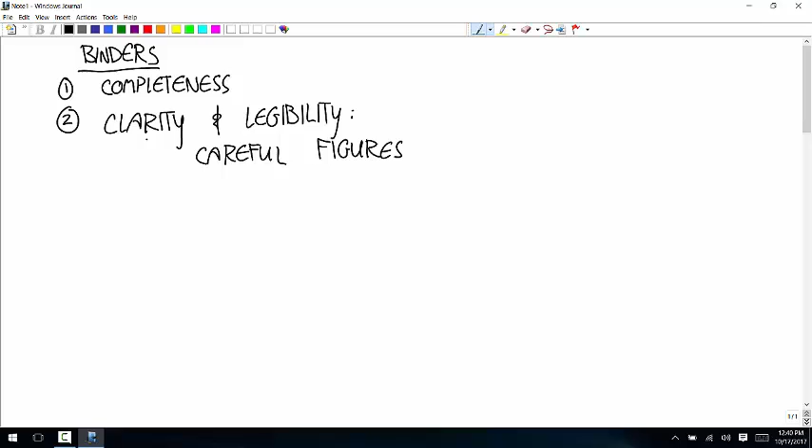I was more lenient on the legibility with the notes because I know you're just trying to get stuff written down as I write it down. Legibility, I was mostly looking at the homework problems, but yes.

Yes. Yep. If you just put those notes in there, that's fine with me.

But you should read them or watch the video or something, or be in class. That's my recommendation. I can't enforce that, but I'm expecting that this binder is going to be your main source of information going back later when you want to figure this stuff out.

And so I was sort of asking myself as I went through the notes, would I be able to, could a person reasonably be expected to follow the stuff that's in here? And if stuff's just all over the place, the sentences aren't complete, there's a word here and arrows, it's just not going to be any use to you. So I was pretty lenient with the legibility, but that's sort of what the clarity referred to.

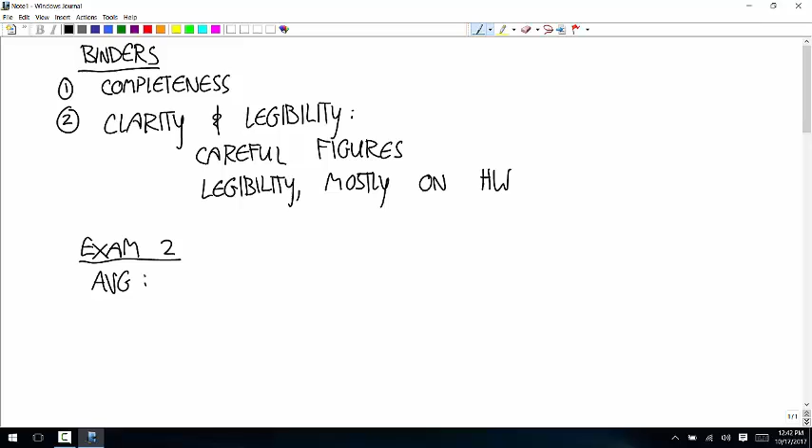Okay, and then the exam, the average was about 85. The median was a little bit higher, let's say 89. There were half of the class had scores above 89% and half below.

If you did your intro, like the evens and odds all on one page, you got that point for that. Well, so there should have been the first time you did it, that was all of them, and then the second time you did it was evens. I don't care if that's on the same paper, but you should have the odds once and the evens twice.

I've been doing that recently with problems, and so far I like it. Just having you go back later, do the problems again. You're going to go back later and do the even ones. It's just so that in your brain, like, I did a problem like this, and I know I did because I did it on two separate occasions. That's the idea.

Any other questions? Are there any exam questions you'd like to see me go through?

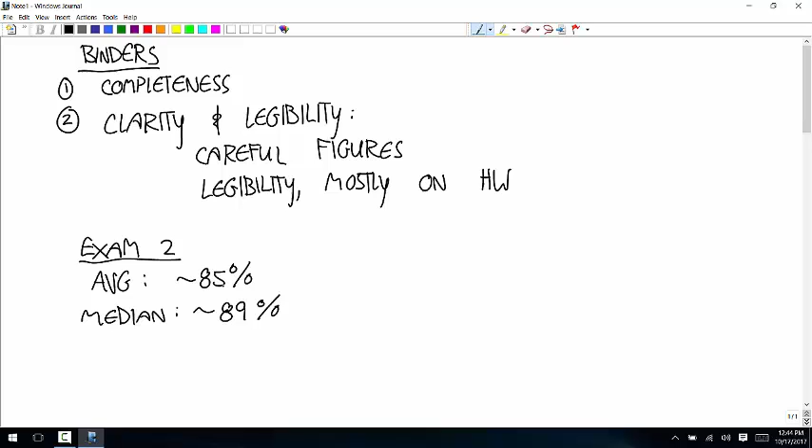Yeah, oh, that's the one where you have to interpolate. So you have a saturated water vapor in a fixed tank.

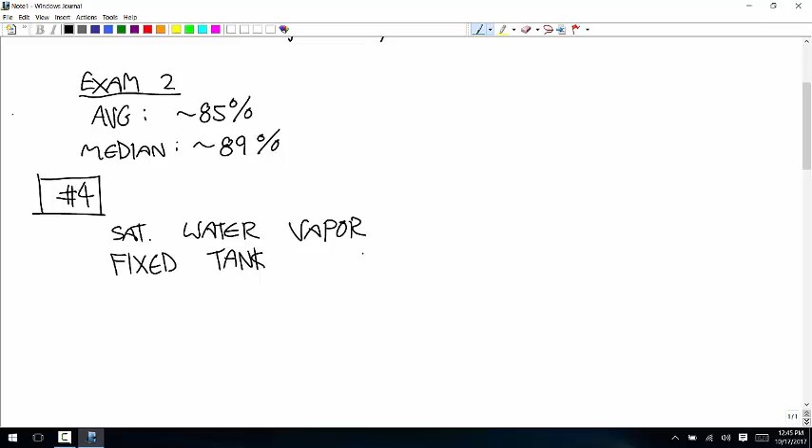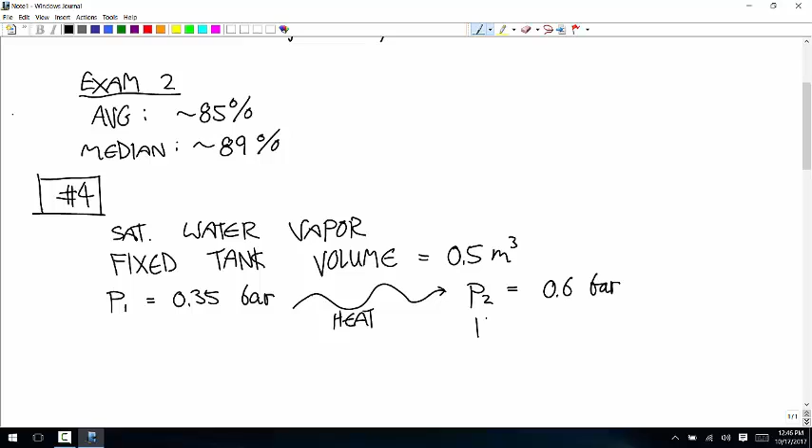With a volume of 0.5 meters cubed, and it has an initial pressure P1 of 0.35 bar. Heat is added until the pressure P2—so we're doing this by putting energy into it through heat—and pressure 2 is 0.6 bar. And the temperature at the second state is 236 degrees Celsius.

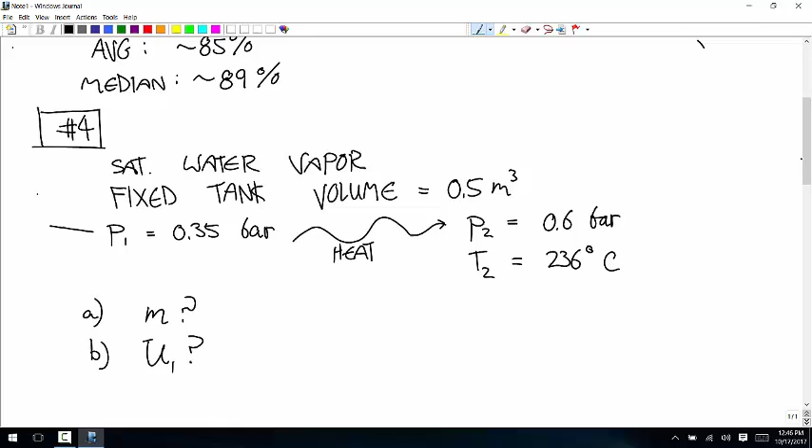And we're going to do this with a table. So first, what's the mass of the water vapor? Second, what's the initial internal energy? And it's not asking for a specific internal energy, it's asking for the actual internal energy. Then we have to interpolate to find the internal energy at state 2. And then finally, what's the amount of energy transferred through heat? So what's Q?

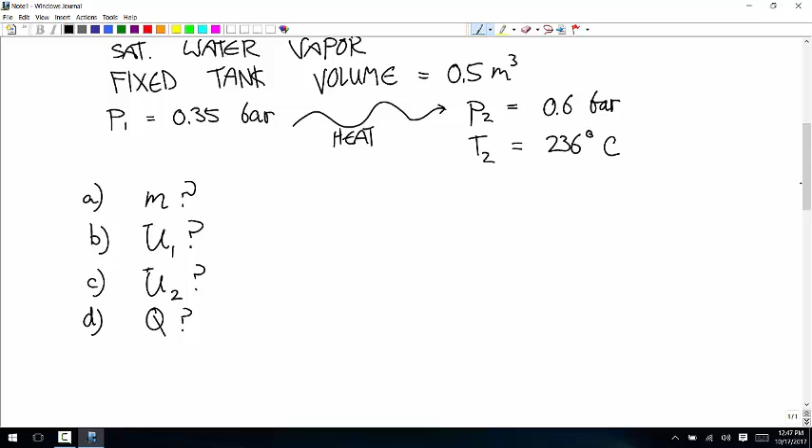Okay, so for the mass, we can use either one of these states. Here's the idea: the specific volume is equal to the total volume over the mass. And so the mass is equal to volume over the specific volume. And so if we can get that specific volume from the table, we can calculate the mass.

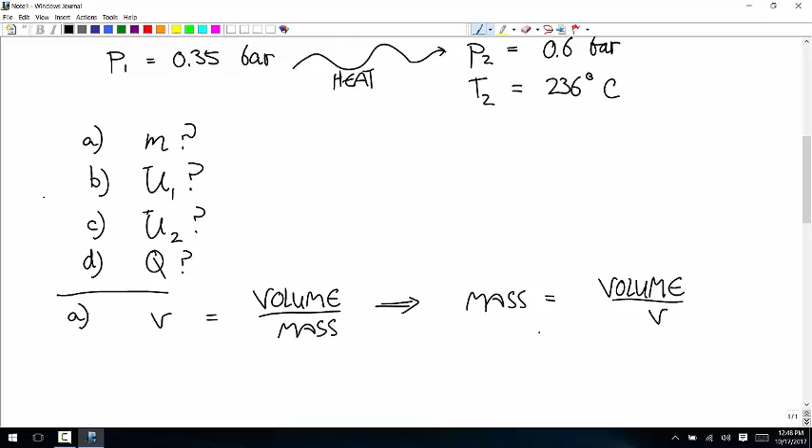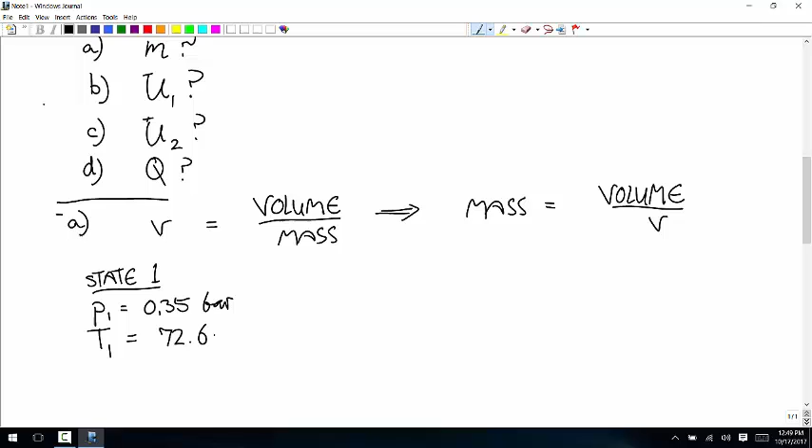So first, for saturated water, it's on the same table. So at state 1, we have a pressure of 0.35 bar, and that happens to be one of the blocks of data on this table. And the temperature is the saturation temperature. So P1 is 0.35 bar, the temperature is the saturation there, which is 72.69 degrees Celsius. And if you use those to look up the specific volume, you get that V1 is equal to 4.526 meters cubed per kilogram.

And so the mass is equal to—it's a fixed tank with a volume of 0.5 meters cubed—so that's 0.5 divided by 4.526. And you get M is equal to 0.1105 kilograms.

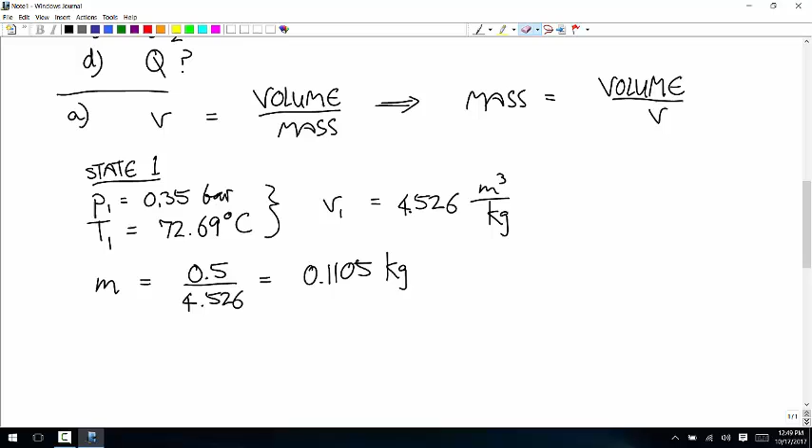And then for part B, the initial internal energy, well, you can just look up the specific internal energy. That's equal to 2473.0 kilojoules per kilogram. And now we know the mass, so the total internal energy is 2473.0 times 0.1105. Could someone multiply that out for me? Oh, I have that here: 273.27. That is in kilojoules.

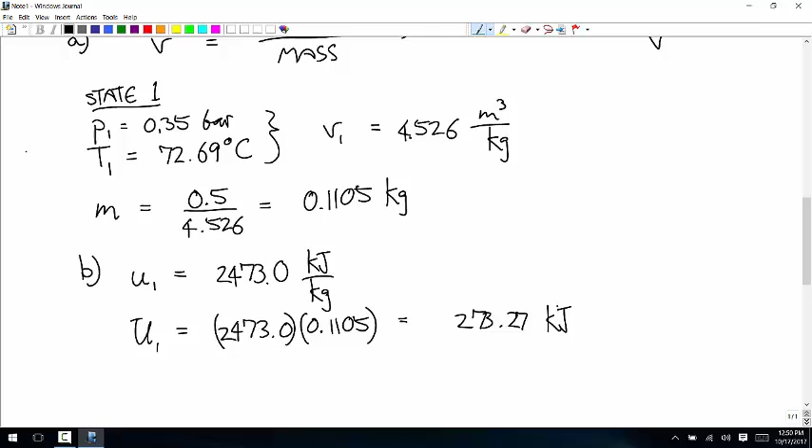Now we want to find the internal energy at the end, so we're going to interpolate. We want to find the specific internal energy as a function of—well, we want to find it at the pressure of 0.6 and a temperature of 236 degrees Celsius.

Okay, so what do we have? We have pressures of 0.35 and 0.70 bar, and we have temperatures of 200 and 240. So the internal energy—I'm going to set it up like this. At 0.35 bar and 200 degrees Celsius, we have a specific internal energy of 2660. Up here, this is 0.35, 240 degrees Celsius, and that's 2720.3. This is all kilojoules per kilogram.

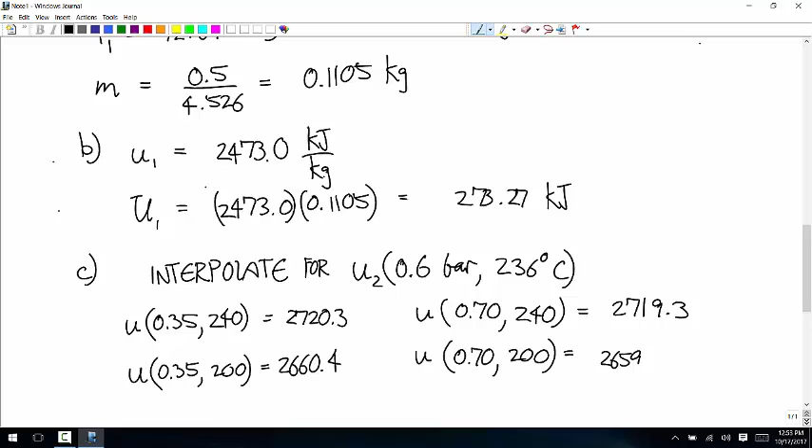And so I'm going to first interpolate to find U at 0.6 bar and 200 degrees. That's going to be equal to 2660.4 plus the quantity 2659.1 minus 2660.4 divided by 0.70 minus 0.35. And then our delta P, our delta pressure, going from the starting point of 0.35 bar is going to be 0.25.

2659.5. Okay. And U at 0.6, 240 is 2720.3 plus the quantity 2719.3 minus 2720.3 divided by 0.70 minus 0.35, times 0.25. What do you get for that one? 2720.3.

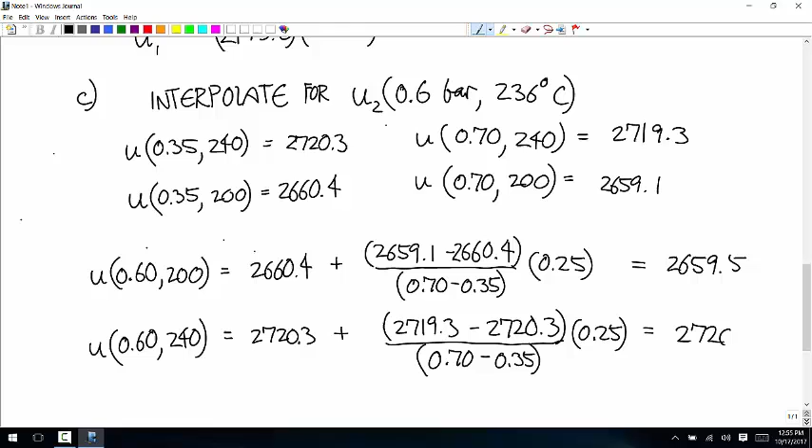Now we're going to use these two to interpolate to a temperature of 236 degrees. So U of 0.6 bar, 236 degrees Celsius is 2659.5 plus the quantity... Sorry, I got for the 0.6, 240 I got 2719.6, not 2720. Oh yeah, I guess that's the same as one of the boundaries. 2719.6.

So this one's 2719.6 minus 2659.5, divided by 240 minus 200, and then times the change in temperature, which is positive 36. And what do you get for that one? 2713.6. Okay, and this is in kilojoules per kilogram.

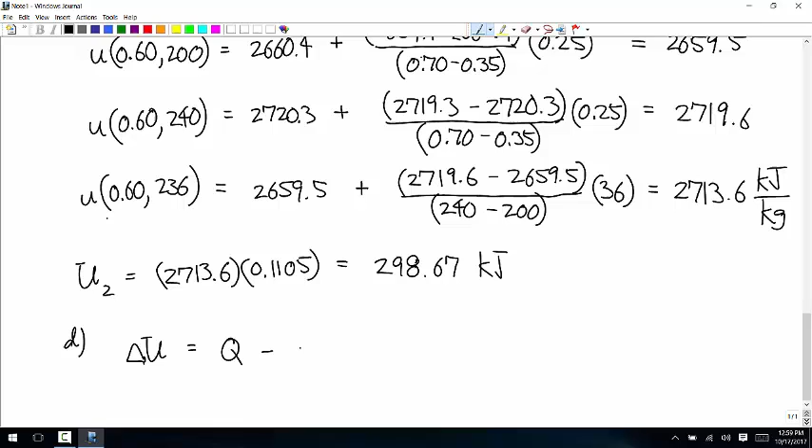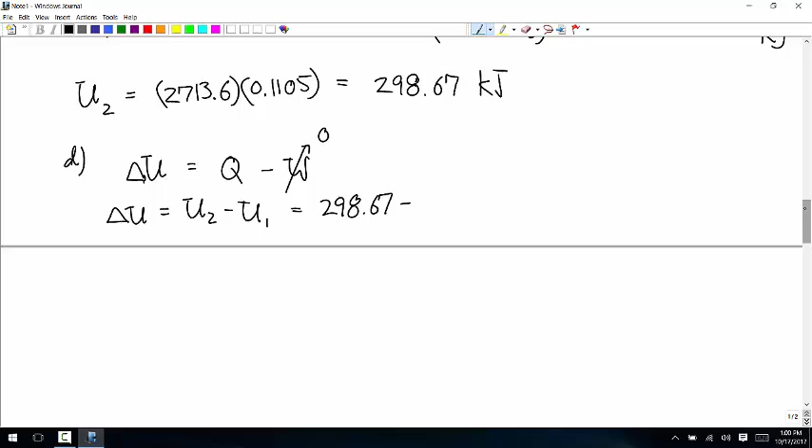Oh yes, okay, so that's U2, the final internal energy. Delta U is equal to U2 minus U1. So that's 298.67 minus, what was the first one? Did we calculate that before? Yes, 273.27.

And what do you get for that? 25.4 kilojoules. And so Q is equal to 25.4 kilojoules. That's my final.

Any questions about that problem? Any other things on the test? Sure.

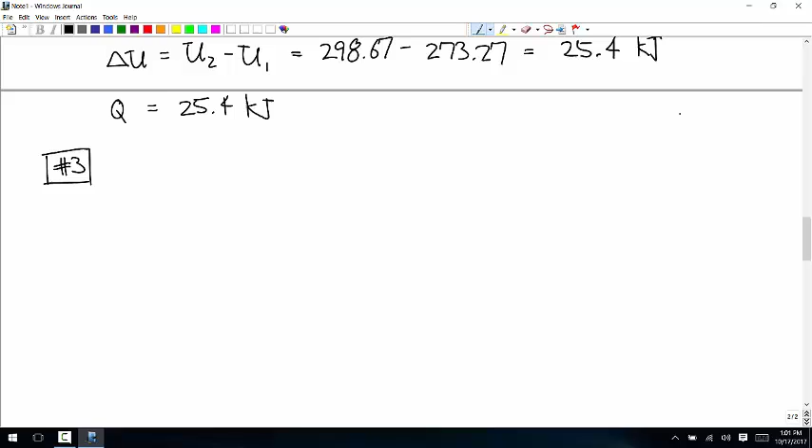Okay, so number 3, there's gas contained in a closed tank. A resistor inside the tank transfers energy to the gas at a constant rate of 1 kilowatt.

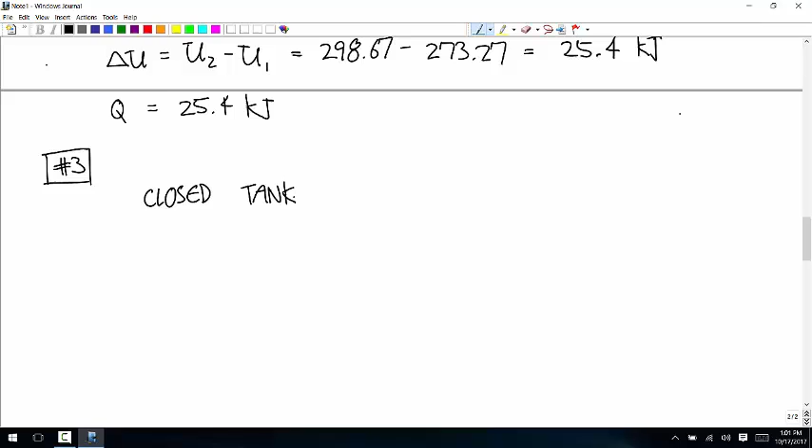So let's say energy is added to the gas, added to the system by work, at a rate of 1 kilowatt. So 1 kilojoule per second.

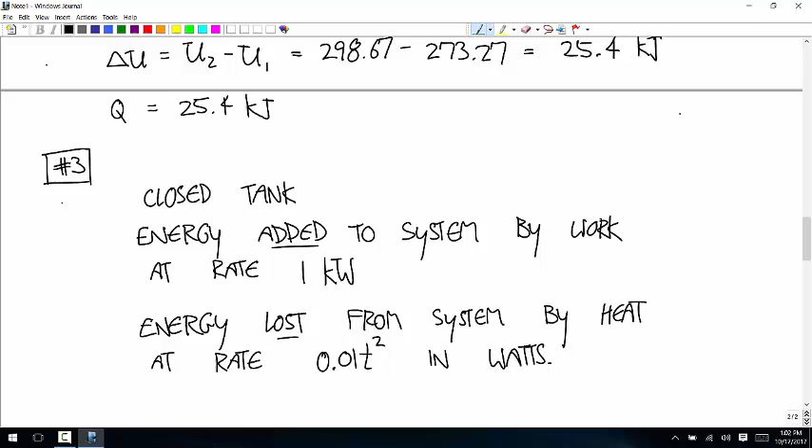Heat transfer from the gas to the surroundings - so energy goes from the gas to the surroundings. In other words, energy is lost from the system by heat at a rate of 0.01 T squared, and that is in watts, and this T is in seconds.

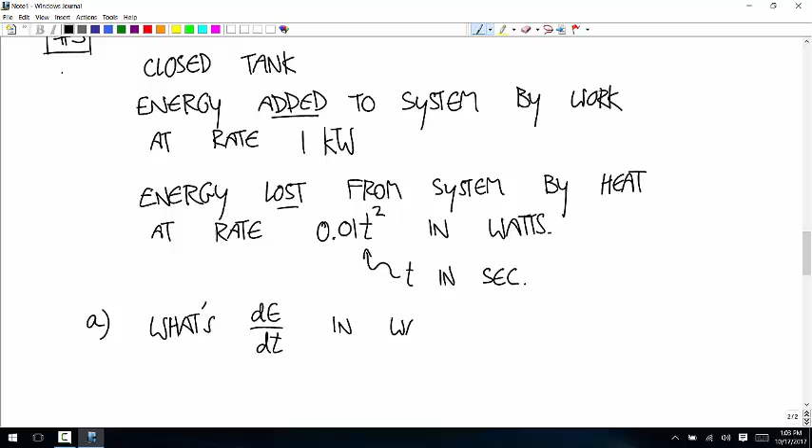And we want to know first, what's the rate of change in internal energy in watts? So what's dE/dt in watts? And then second, what's the change in internal energy? This is internal energy - I have that written as total energy, but we don't have any reason to think there's kinetic energy or potential energy, so I'll write that as internal. And then what's the change in internal energy as a function of time?

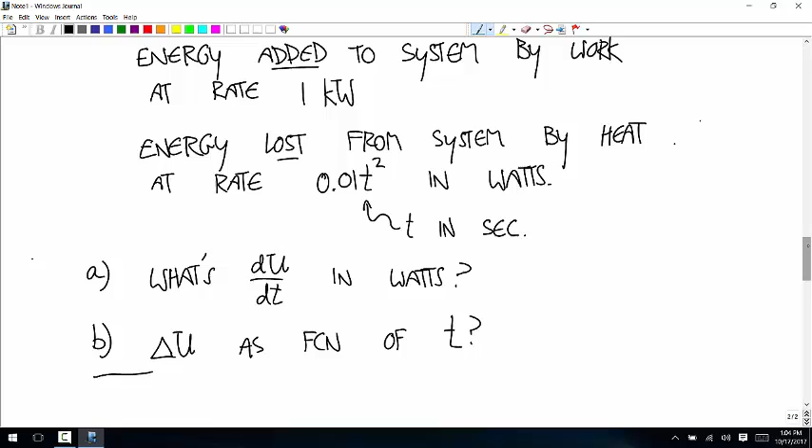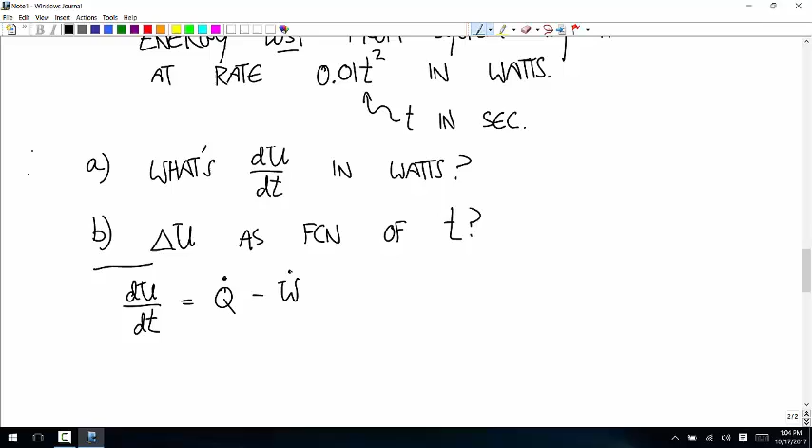Okay, so dU/dt is equal to the rate of heat added minus the rate of work done. Q dot is positive if heat is being added to the system. In our case, it's being subtracted. So this is equal to negative 0.01 T squared.

And then work is being added to the system. W dot is positive if the system's doing work. This is negative 1 times 10 to the third - the times 10 to the third is because this is given in kilowatts. And so dU/dt is equal to 1 times 10 to the third minus 0.01 T squared. So the rate of change of the internal energy is smaller as time goes by.

And then second, we want to calculate the change in internal energy from time equals 0 to t. If you want to make your math professors happy, use a dummy variable in the integral, but I don't care about that. So delta U is equal to the integral from 0 to t of 1 times 10 to the third minus 0.01 t squared dt. So delta U is equal to 1 times 10 to the third t minus 0.01 over 3 t cubed.

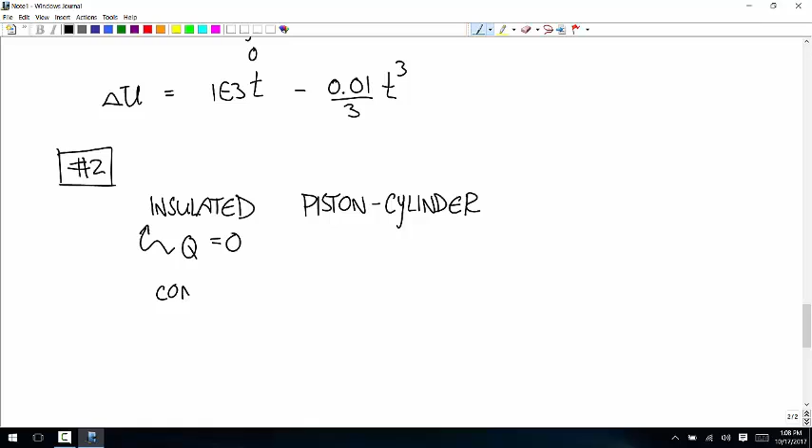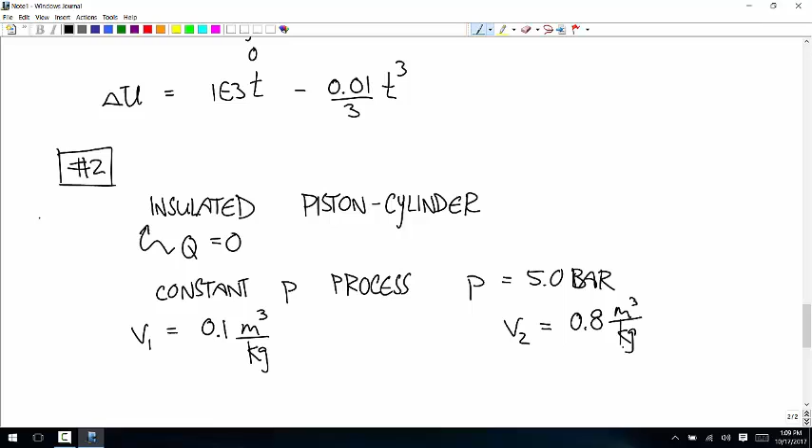Okay, so for number 2, 0.6 kilograms of gas is in an insulated piston cylinder. Insulated means Q is 0. It undergoes a constant pressure process where P is 5 bar. Specific volume starts at 0.1 meters cubed per kilogram and ends at 0.8 meters cubed per kilogram. 5 kilojoules of electrical work is added.

What's the change in internal energy? So let's write out the equation first. The change in internal energy is equal to the heat minus the work. It's insulated, so there's not any Q. And then W is equal to the W due to expansion plus the W from that resistor. And remember, W is positive if work is done on the surroundings by the gas.

So if energy is lost by the gas - in this case, energy is being gained by the gas - this is going to be negative, so this is negative 5 times 10 to the third joules.

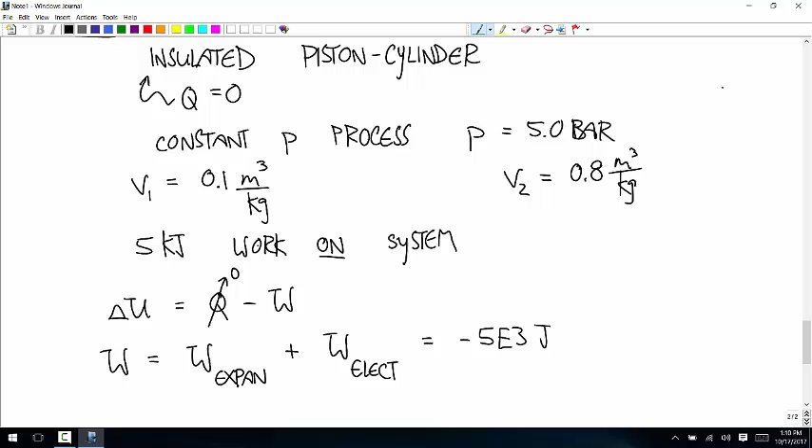Sorry, that's this one. Negative 5 times 10 to the third joules.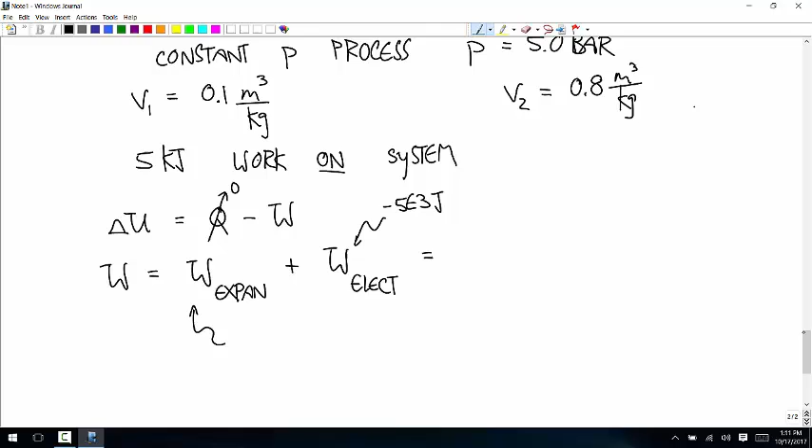And this one is the integral of PdV, which, since it's a constant pressure process, is just going to be P times V2 minus V1.

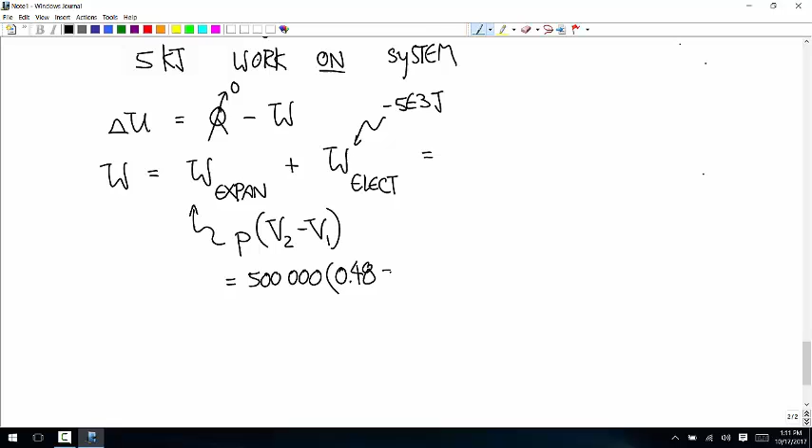P is 5 bar, so 500,000. V2 is 0.8 times 0.6. V1 is 0.1 times 0.6.

Okay, so what's 500,000 times 0.42? Okay, so 210 times 10 to the third minus 5 times 10 to the third joules. So that's positive 205 times 10 to the third joules.

And so delta U is equal to negative 205 times 10 to the third joules. Any questions about that one?

The system is going to do work. Yep, if it expands, the system does work. Yep, if it is compressed, work is done on the system.

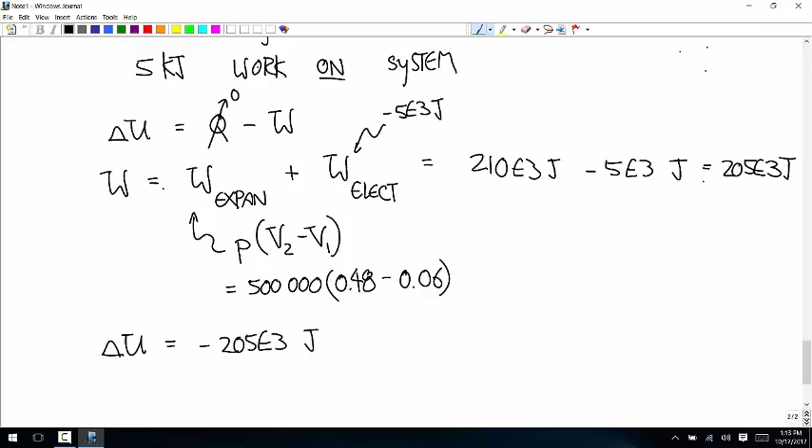And then number 1. So it has a circular shape.

There's a downward force of 1,000. There's also a downward force of 1 times 10 to the 5th times the area. And then there's an upward force of that internal pressure times the area. The area is pi r squared.

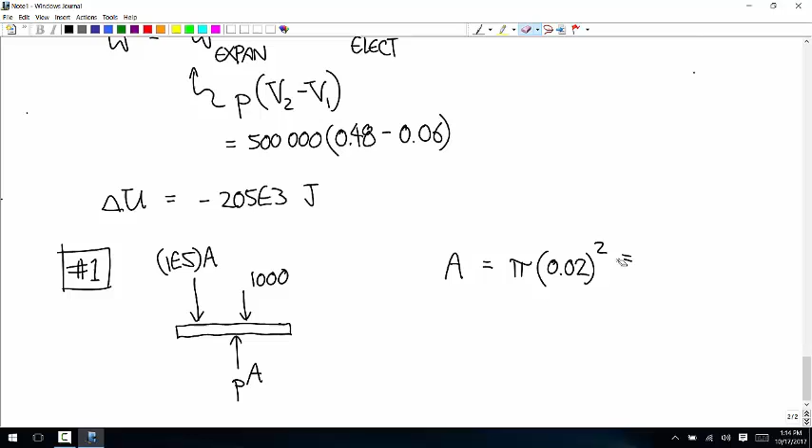I don't have that written down. But so you can write this using Newton's second law. So 1 times 10 to the 5th times A plus 1,000 is equal to that internal pressure times A.

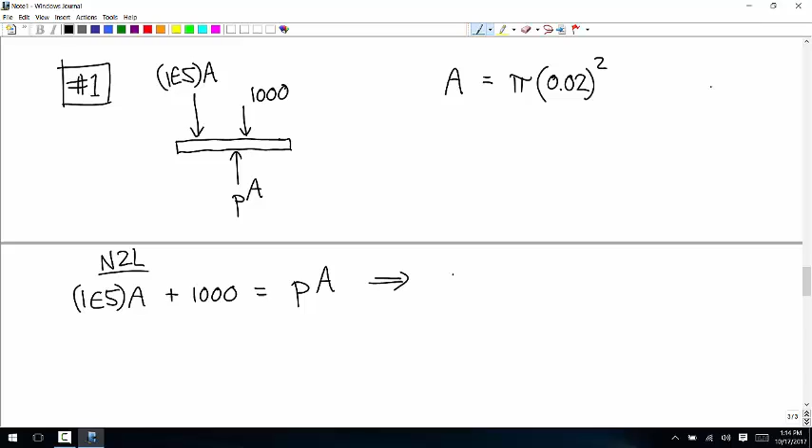And if you solve it, you get pressure is equal to 8.958 times 10 to the 5th pascals.

Sure. How did you get a final value of negative if your expansion plus your electric is a positive 205? Yeah, because I'm plugging it back into this equation here, and that work term is negative in that equation.

You know, all this stuff would be, the signs and everything would be a lot easier to deal with if they just always called these energy terms positive if work is being added to your system. But we don't get to choose that anymore. So, yeah.

Mm-hmm. Yeah, I think there were a lot of people like that. Yeah, yeah, yeah, yeah. Okay.

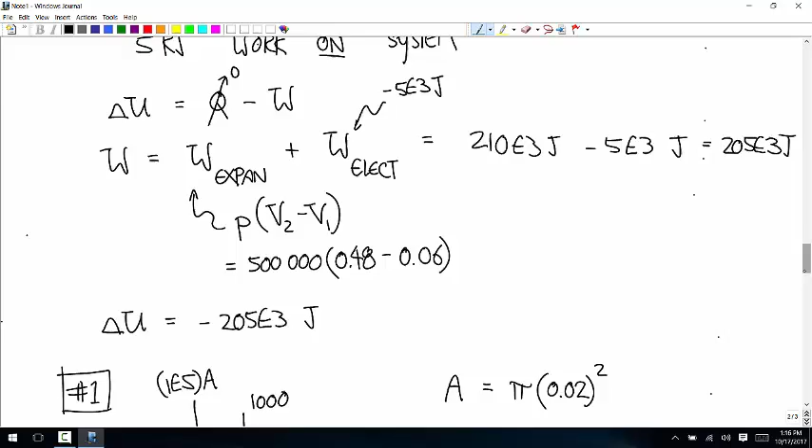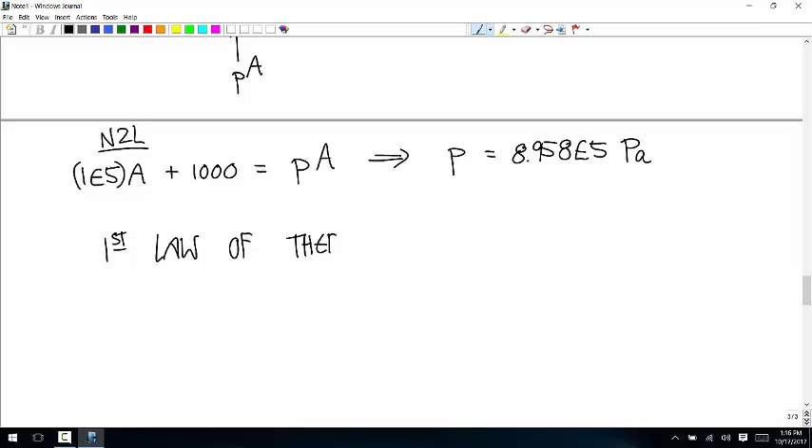So that's the test. So let's go back to what we were doing before. We're using the first law of thermodynamics for control volumes.

And the equation looks like the rate of change of energy in the control volume is equal to the rate of heat added to the control volume minus the rate of work done by the control volume

plus the rate of mass flow into the inlet times the quantity. So now we have enthalpy at the inlet plus speed squared over 2 plus 9.81 meters per second squared times the height at the inlet

minus the rate of mass flow at the exit, out of the exit, times the quantity enthalpy at the exit, plus speed squared over 2. I guess I'll give this one the subscript I and this one the subscript E, plus GZ exit.

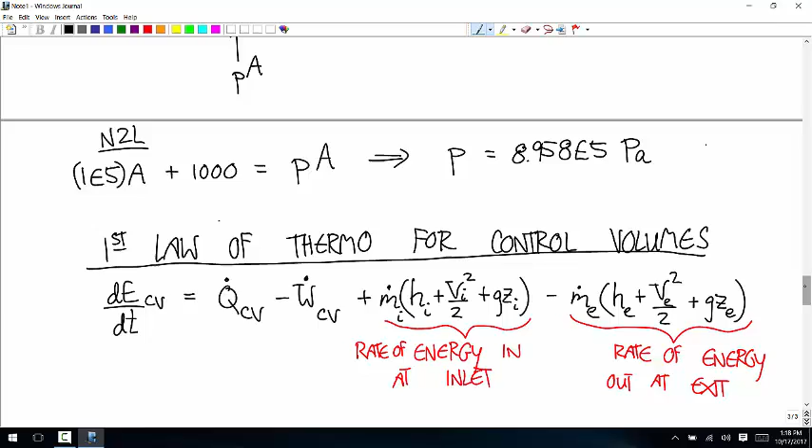And I said last time that this is the full equation for first law of thermodynamics for a control volume. And then a lot of these things are going to be zero pretty often. So we're never going to deal with anything that looks very much like this. A lot of things are going to cancel.

So let's think back about, so stuff will always cancel. Why? Okay, so let's go term by term. First, what about the rate of change of internal or of mechanical energy, all energy, inside the control volume? Why would that cancel?

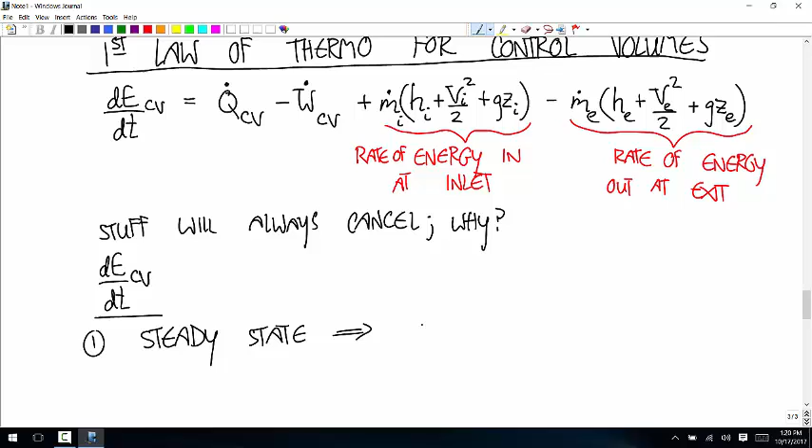Steady state, yep. So if it's steady state, any properties representing the control volume have to be constant. The rate of change of properties has to be zero.

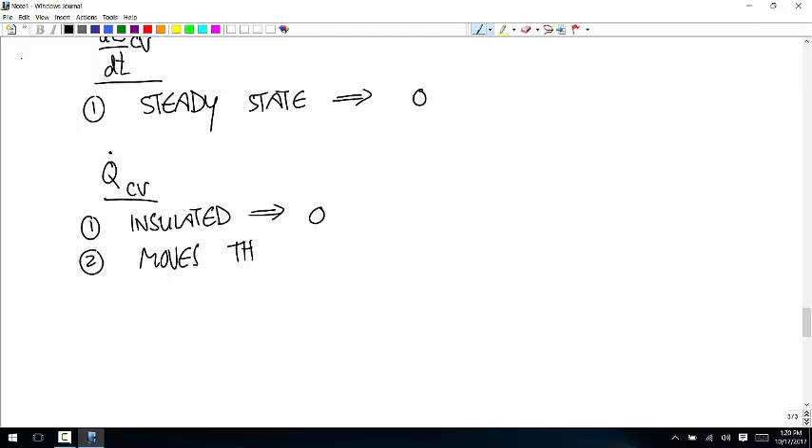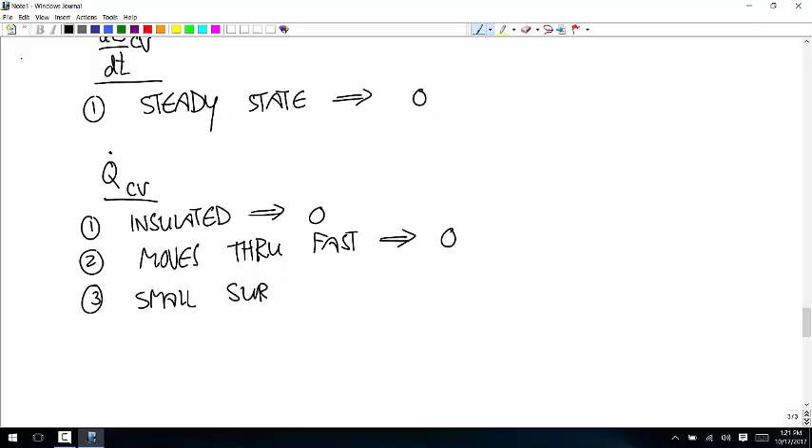Next, what about the rate of heat added to the control volume? Insulated, yep. Or it moves through fast, that's right. And that's right. Yep, good. That's the one I forgot.

Small temperature difference. Can you tell us if there's a small difference, or would you give us a range? Yeah, well, I mean, it's just a matter of how much precision you need. I guess, yes, the answer is there'll be stuff in the problem that will tell you that. It'll say ignore this, or it'll say that there's a small temperature difference, or yeah. I'll give you something in the problem to tell you what equation.

It's in my interest to have you all use the same form of the equation on problems, so I'll make that clear. But I guess one thing I do want to clarify is when you say small, it's always going to have to be small relative to something. What's the parameter? Well, yeah, so basically, the bigger that temperature difference is, the bigger the rate of heat leaving by conduction through the boundary. Okay, there's no cutoff. It's just a matter of what that difference would be. And for engineering applications, apparently it's frequently, usually the case that there's not enough of a temperature difference for that

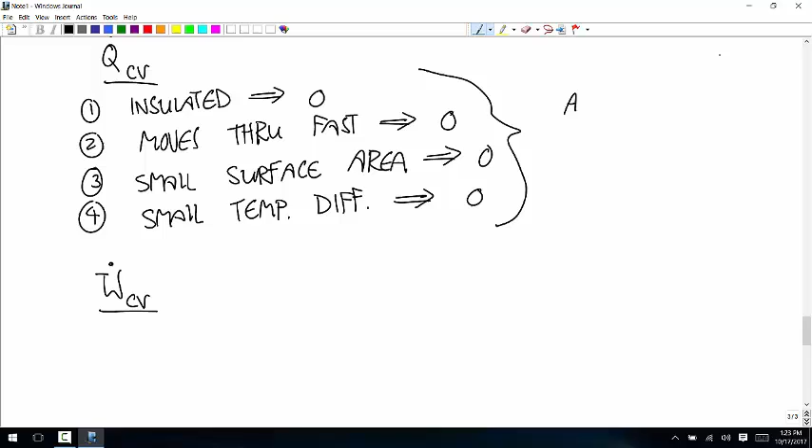So now, what are the things that affect the rate of work done by the system in the control volume on the surroundings? And one thing about these: do you need all of these to be true, or is any one enough? So any one will do it.

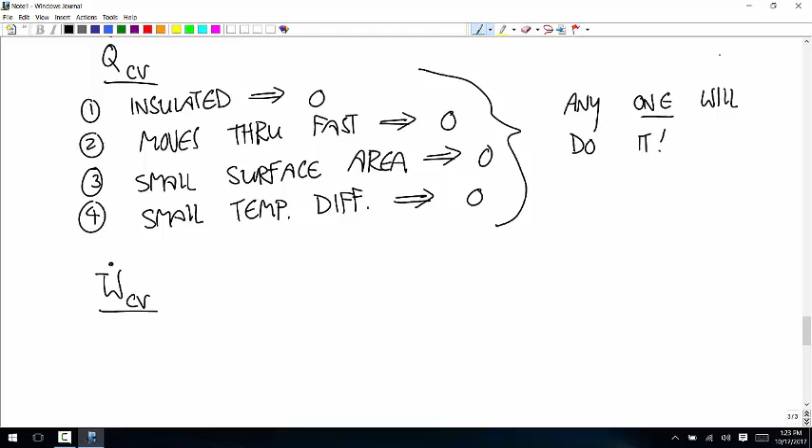Unless it's compensated by another one of them, like if the surface area was small but the temperature difference is large, like the sun. Yeah, that. Don't think about it like that.

Okay, and now for the rate of change of energy that leaves from work, what are some reasons that this would go to zero? Yep, no displacement at the boundary.

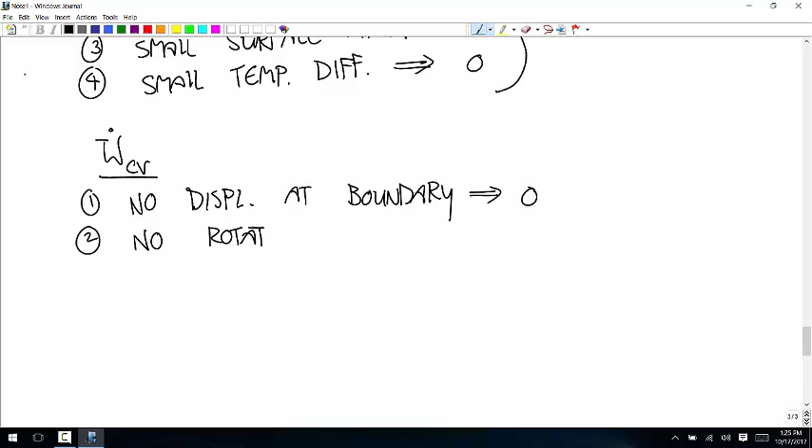What's another one? The one that seems kind of questionable to call it work, seems sort of thrown in for no reason. But that's true: no rotating shafts, so motors and stuff you wouldn't use this. The one I was trying to get at was electricity. It's thrown in to call it work.

Yeah, it seems like it could just be thrown in anywhere, or heat. I mean, that electrical work is raising the temperature. But I suppose the idea is that it's actual charged particles being moved apart, so while it's still electricity, it's doing work. But anyway, electrical work—if there's none of that, then the work goes to zero, and that's it.

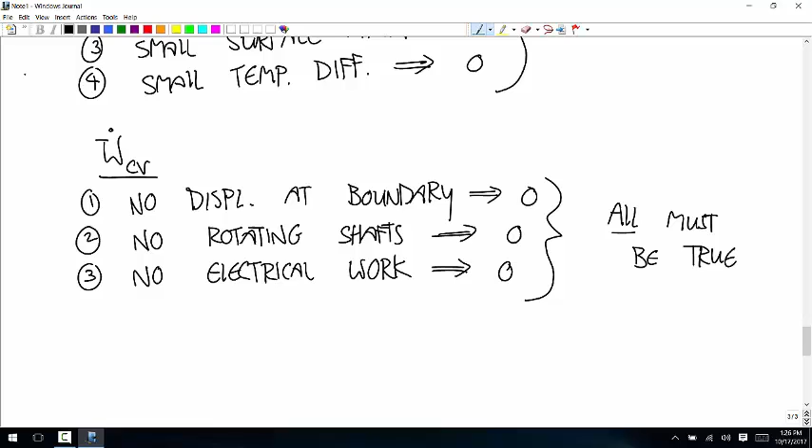The key thing is, do we need one of these to be true or all of them to be true? The electrical thing is that in some sense it doesn't matter all that much how it's categorized. Right, exactly. It seems like they just had to choose something to throw it into. But, okay, what about...

Kinetic energy? Well, I'll do these. This is usually small compared to the other terms. And this is the one where we're going to get to an example eventually where we make the assumption there's no change in kinetic energy, and then we actually calculate it for a realistic set of values, and see how small it is.

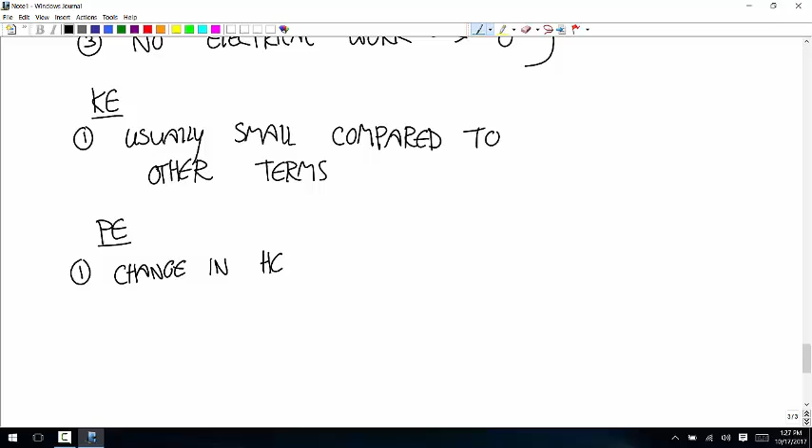And then potential energy: if the change in height is negligible, then this goes to zero. Most of the time that's going to be the case. We'll do one example in this section where we can't ignore that, and that's for a liquid pump—like if you're trying to pump water out of your basement, it's a really key thing to know that you have to pump the water 5 meters up. But the other examples, I think, are all going to have that be zero.

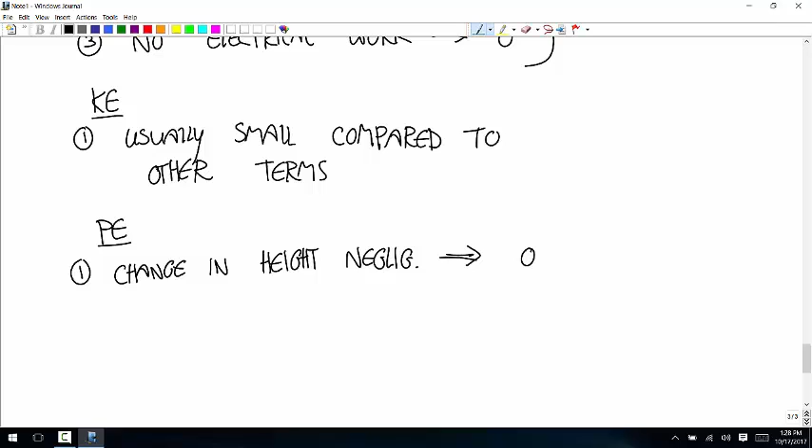Okay, so now we get to the first application: nozzles and diffusers.

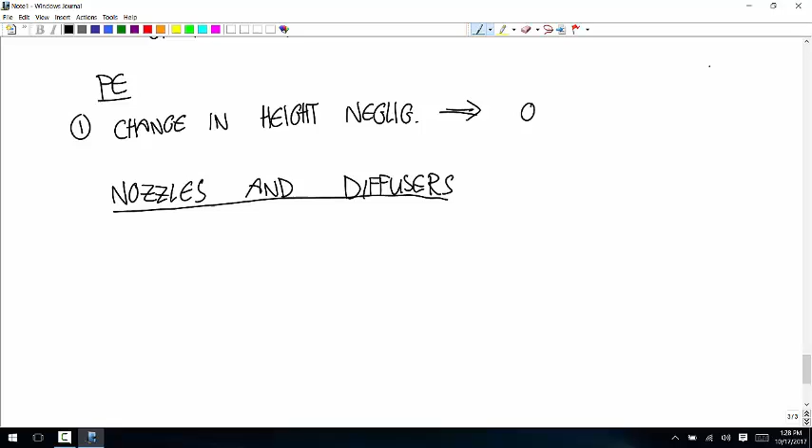Earlier on, you said... so up here you just said kinetic energy is usually smaller compared to other terms, so does that mean you also have to say ignore it for that? Yeah, it's usually small enough that you can ignore kinetic energy.

No, so we'll see, like with a pump, you don't use a change in kinetic energy to get that change in potential energy—you use change in enthalpy or something between the two. So yeah, we're used to thinking of mechanical energy as just an exchange of kinetic and potential, but that's only in certain cases, and now we're dealing with other cases where there are other forms of energy.

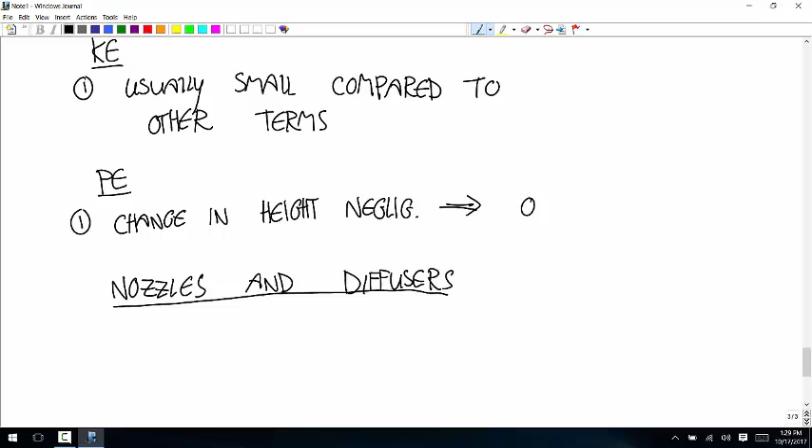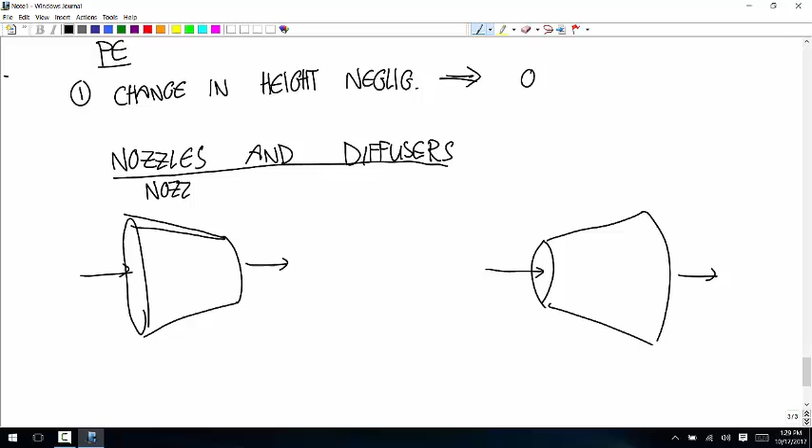So nozzle and diffuser, I already drew this picture. If you have something going this way, okay, so here are the two examples. Which of these is a nozzle? This is a diffuser.

For the nozzle, so if this is state 1, state 2—for the nozzle, which velocity is higher? Yep, V2 is higher than V1, and which pressure is higher? Yep, 1 is higher than 2. For the diffuser, it's all reversed, so V1 is higher than V2, and P2 is higher than P1.

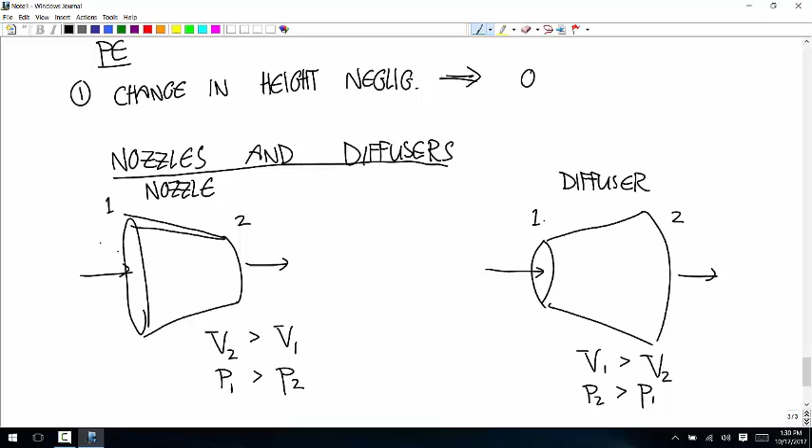Here are the assumptions we're going to make. First, we're going to assume that in the flow of material, there's no big change in height. So what term is going to go away because of that? Yeah, so the change in m dot g z is 0.

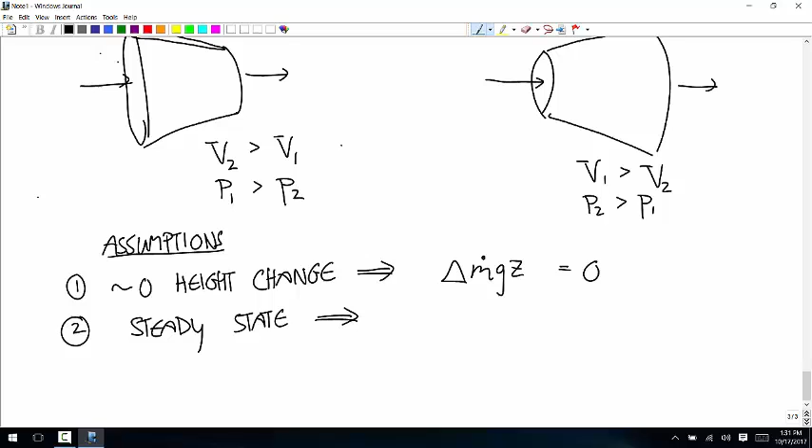We're going to assume there's no accumulation of material inside the control volume, so this is in steady state. And so what do we know because it's in steady state? Yep, the dE/dt for the control volume is 0.

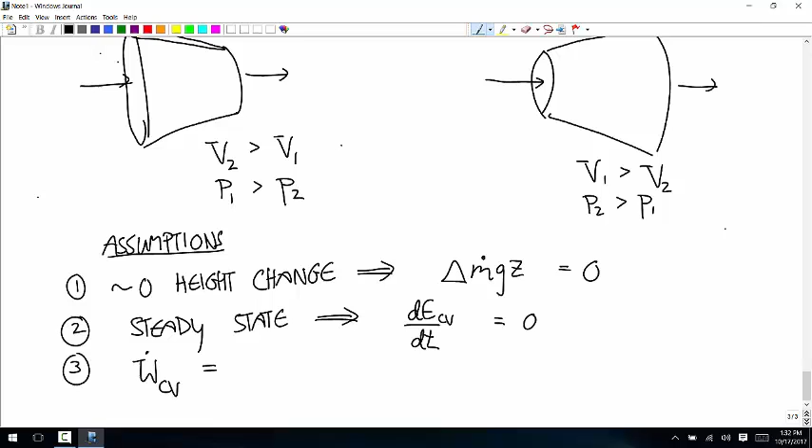We're going to assume there's no displacement at the boundary, no rotating shafts, no electricity. Write all that down. W dot is equal to... 0. Exactly, thanks for finishing that. And it's moving through fast, so there's not going to be any heat. So Q dot CV is 0.

I said before there's no accumulation of mass inside the control volume, so M dot at the inlet is equal to M dot at the exit. We'll just call it M dot. So what do you get when you put this all together?

We'll start with this: dE/dt is equal to Q dot minus W dot plus, I guess I'll make the switch now to the MI dot and the ME dot, I'm going to call each of those just M dot. So we have the enthalpy at the inlet plus the speed squared at the inlet over 2 plus GZ at the inlet, minus M dot times the quantity enthalpy at the exit plus V exit squared over 2 plus GZ exit.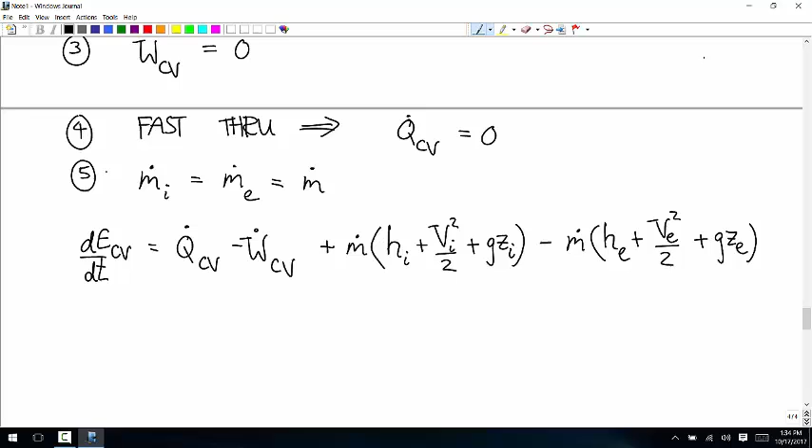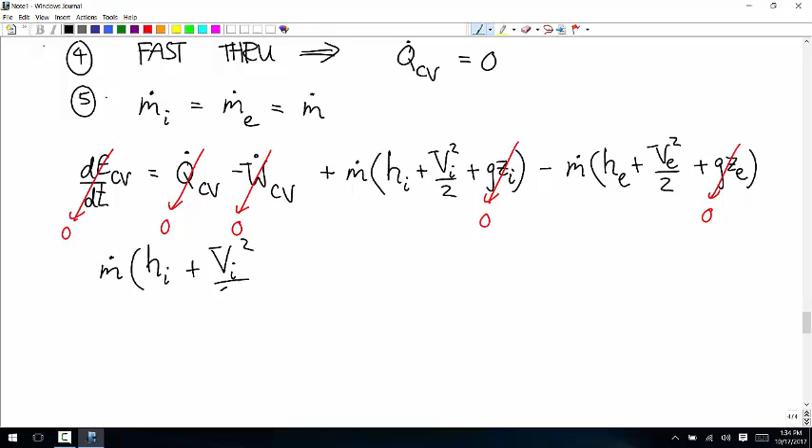So what goes away? This goes away, this goes away — no change in height. And so we're left with an equation that comes out to be M dot times the quantity H inlet plus V inlet squared over 2 is equal to M dot times the quantity H exit plus V exit squared over 2.

You can keep moving this around and come up with a form that says the enthalpy at the inlet minus the enthalpy at the exit is equal to the speed at the exit squared minus the speed at the inlet squared, over... I don't know if that's the best form, you can put it in whatever form you want, but those are the terms that matter. So what's going to contribute to the change in speed is the enthalpy at the two ends. If you can calculate the enthalpy, you can calculate the speed, or vice versa.

So here's an example. Let's say this is a nozzle, and you have steam entering — steam at the inlet. Pressure at the inlet is 40 bar, the temperature at the inlet is 400 degrees Celsius, speed at the inlet is 10 meters per second.

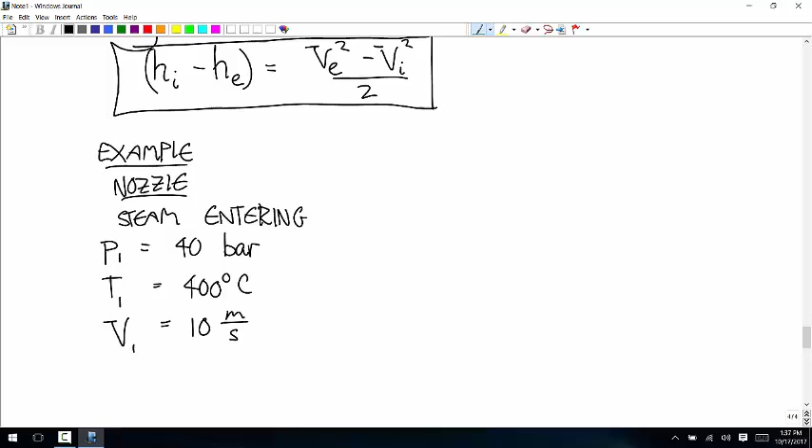There's no heat transfer, there's no change in potential energy. Okay, so here's a question.

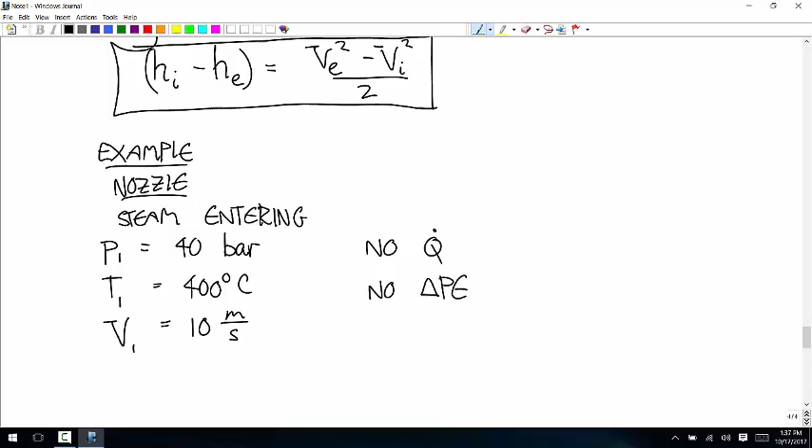If on each individual problem I'm going to give you the assumptions you can use, what was the point of going through all of this and coming up with this simplified equation? If we're going to have to start at the full first law each time and cancel stuff, what's the point of even giving this? I think to me this is just a nice intuitive thing — the rough idea of a nozzle. If you're trying to figure out the speed of water coming out of a hose or something, you could use this and tables and a couple of assumptions to do a rough calculation in your head. But for individual problems, we're going to have to make sure each term cancels before we cancel it.

Okay, and then P2 — is P2 going to be bigger or smaller than P1? Don't look back. So let's say 15 bar. V2, bigger or smaller? Bigger, so let's say that's 665 meters per second. And over the whole thing, the mass flow rate is 2 kilograms per second.

Okay, so let's say the first thing we want to know is, could we do this nozzle with our thumb? Could we just use our thumb to make this nozzle? No, probably you don't want to do that with 400 degree Celsius steam. So we want to construct some kind of thing, and we want to calculate the exit area.

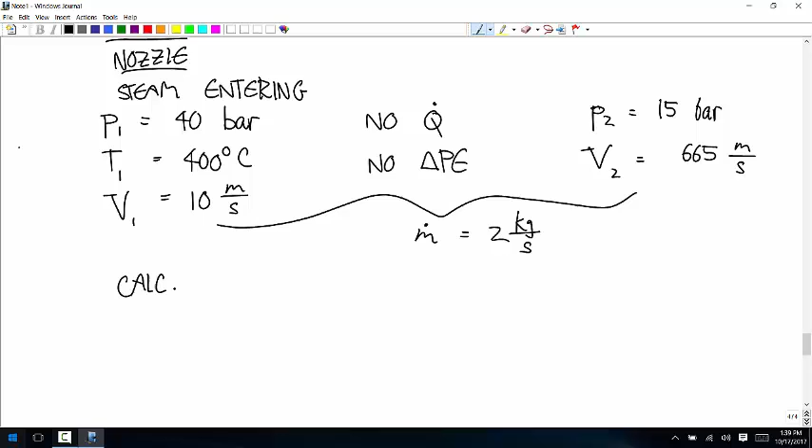Okay, so how do we get the exit area? No exit area appears in any of this stuff, so how do we get that into the calculation? Remember this: the rate of mass change is equal to the density times the change in volume, and density is 1 over specific volume. So you can write this as A times the speed over the specific volume. The capital V is the speed, little v is specific volume.

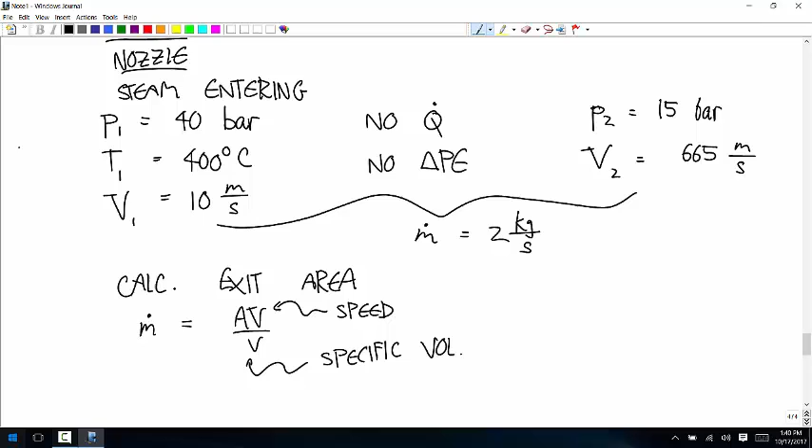A2 is equal to, if you rearrange this, m dot times specific volume divided by the speed. This would be at instant 2.

Okay, now plug this into the simplified first law. So let me write it the way I had it before. H inlet minus H exit is equal to the speed at the exit squared minus the speed at the inlet squared, over 2.

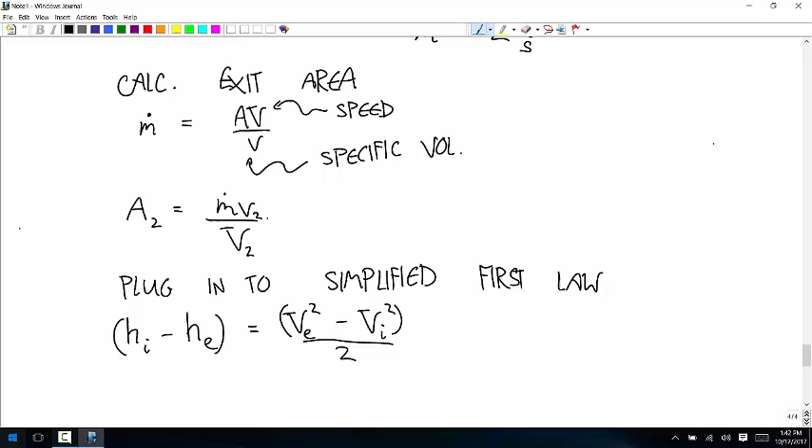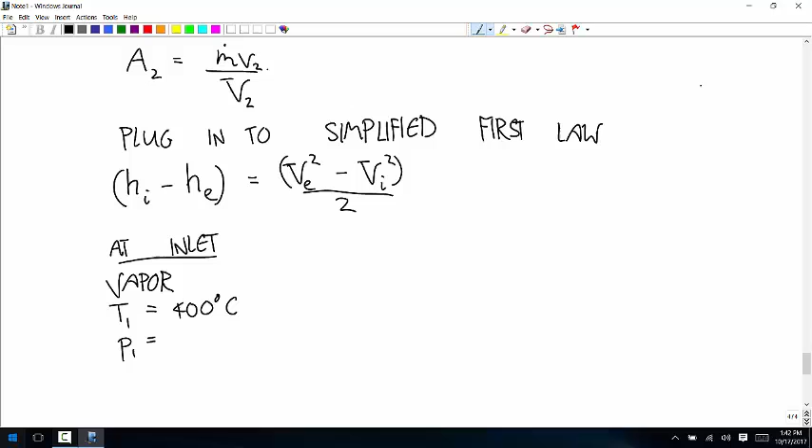Now we need enough information at one of these states to use the table. At instant 1, or at the inlet, we know the temperature, that the state is vapor, the temperature is 400 degrees Celsius, and the pressure is 40 bar. Using the vapor table, H inlet is 3213.6 kilojoules per kilogram.

If we had a little more information at the exit, we could just use the table to calculate the enthalpy change there too, but we don't. We have to use this equation.

So 3213.6 minus the enthalpy at the exit is equal to the speed at the exit, 665 -- oh, be careful with the units, so this is times 10 to the third, writing this now in joules -- 665 squared minus 10 squared, divided by 2. You can use that to calculate that the specific enthalpy at the exit is equal to 2992.5 times 10 to the third joules per kilogram.

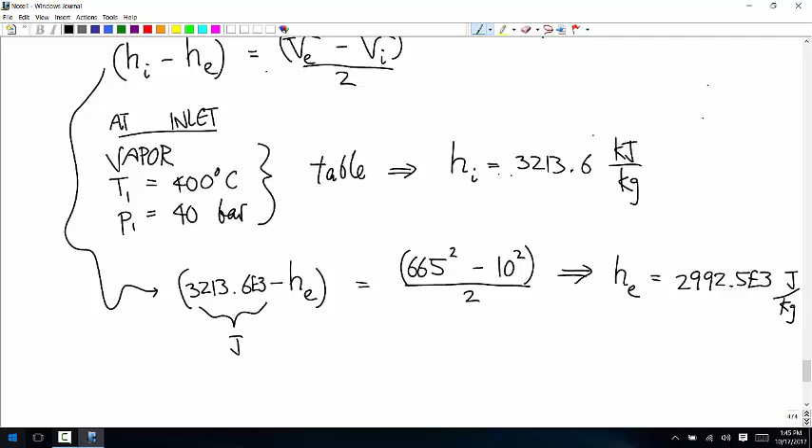Okay, now in order to calculate the area at the exit, we know the rate of mass transfer, we know the speed at the exit, but we don't know the specific volume. How are we going to get that?

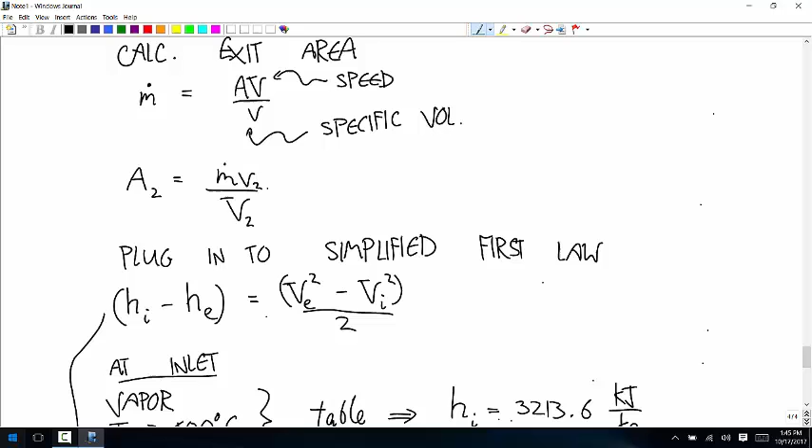Well, now that we have this enthalpy at that state, we can just look through that table for an enthalpy value that looks like that. So go to the table again. If you have a pressure of 15 bar and a specific enthalpy of 2992.5 times 10 to the third joules per kilogram, then you can figure out that the specific volume is 0.1627 meters cubed per kilogram.

And then finally, A2 is equal to -- we had that as m dot times the speed at 2 divided by the specific volume at 2. You can plug all those in now and you get 4.89 times 10 to the minus fourth meters squared.

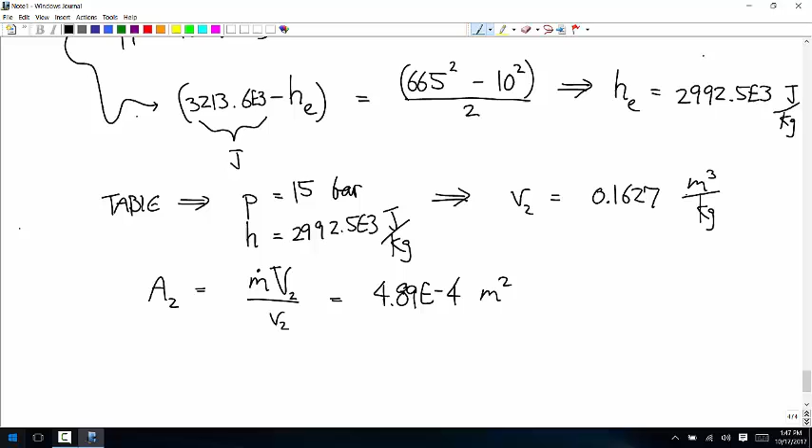Any questions about that? Yes. Oh, I wrote it as -- thank you. Where did I rearrange that? Yes, specific volume up here, speed down here.

Okay, I'll give you a couple problems to do with nozzles and diffusers. The next thing we're going to talk about is turbines.

Turbines are used to generate power. A fluid, either a gas or a liquid, flows into these blades and spins a shaft. The idea is that the gas at the inlet has a high pressure, the gas at the exit has a low pressure. I think most of the time it's steam that's used for turbines.

I don't know if you have this impression, but when I think of steam being used in power plants, I kind of have this image of an olden day factory or whatever, like steam is not a high tech thing. But in fact, in turbines, they do use steam. What's high tech is just how they get the steam up to the super high temperature. So in a nuclear plant, they use nuclear fission to get this steam to an incredible temperature, and then they still use the steam to turn the turbines that eventually create electrical power.